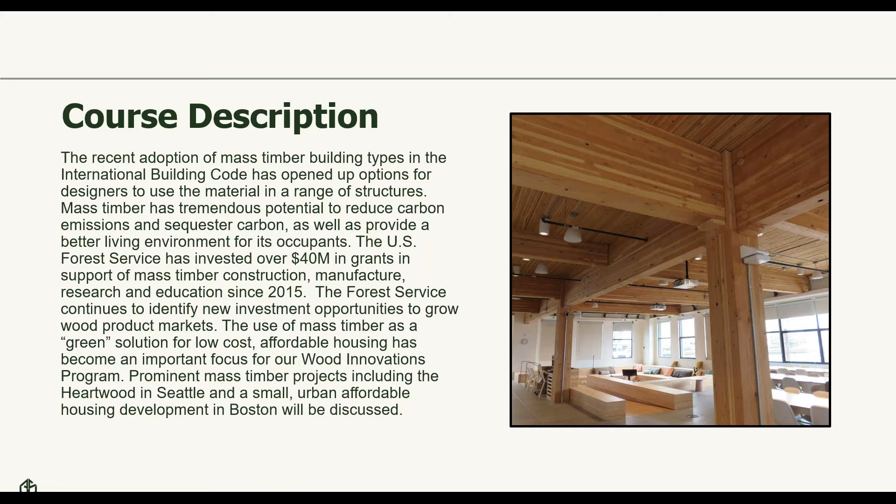We'll be covering the use of mass timber as a green solution for low-cost, affordable housing, and also look at a couple prominent mass timber projects in Seattle and Boston.

Again, you hopefully saw the objectives when you registered, but by the end of this program, you should be able to recognize efforts to promote mass timber investment opportunities, explain why mass timber is a viable alternative for affordable housing, describe how mass timber can overcome challenges related to urban infill construction, and discuss why mass timber is a feasible option for both large and small projects.

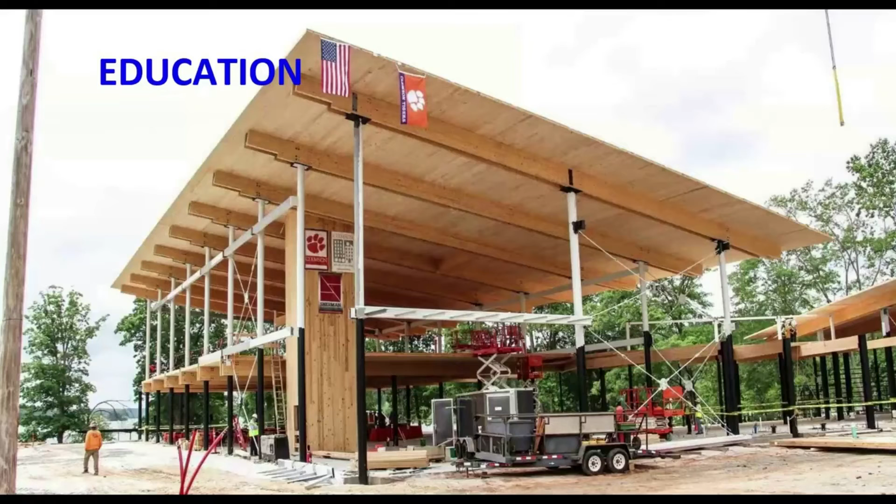I want to point out that building is the Andy Quattlebaum Outdoor Recreation Center at Clemson University, built with southern yellow pine. That was the first southern yellow pine mass timber building east of the Mississippi. We funded Clemson University a grant last year to develop a combined training curriculum for architect, engineering, and forest product students.

Clemson partnered with the Softwood Lumber Board and WoodWorks to implement this program. What's unique is during the school year it'll be for students, and in the summer it'll open up to the construction, engineering, and architect professionals applying the trade now. This is something the Softwood Lumber Board, our partner, has a strong focus on, and I think we'll see this potentially over time with other universities.

I think that's really great. That's where we need to see a lot of education, of new students, not just current practitioners.

Think Wood Mobile Tour - we helped fund that again this year. That's an initiative led by the Softwood Lumber Board and Think Wood. The Think Wood Mobile Tour partners with the AIA to take this mobile wood product display around to universities and to wood product events in the U.S. This has been a very successful program and has brought a lot of attention to wood and to mass timber.

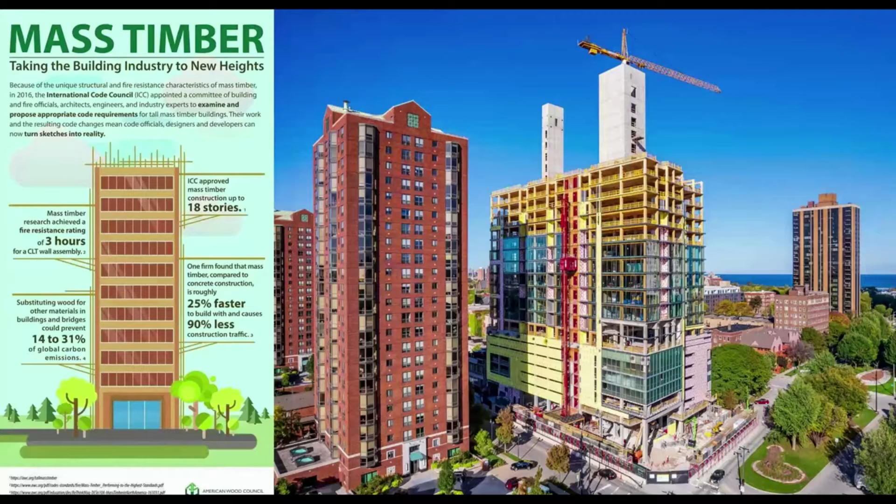Research and code - a lot of our funding goes to support partners doing research for mass timber. We helped support different partners, which ultimately led to changes in the 2021 building code, allowing tall timber buildings up to 18 stories. Most recently, we've supported fire testing with partners that helped make changes to the 2024 tall timber portion of the IBC, which allows exposed mass timber up to 12 stories, which is really great.

We've done fire testing at the Forest Products Lab. We've also supported fire testing with other partners as well, which all led to those changes in the code.

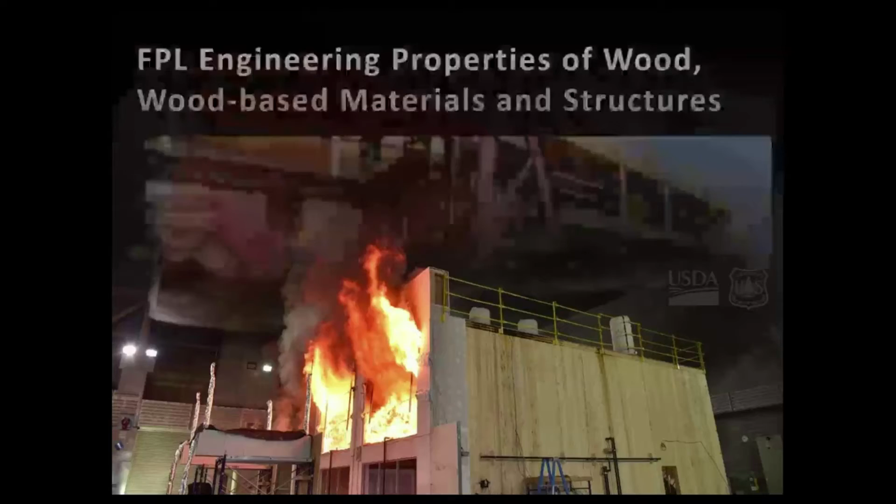Most recently, we're supporting the 10-story shake test that will take place soon in San Diego. This will help strengthen new opportunities along the earthquake zones in the West and give greater confidence to building and code officials for mass timber and tall timber buildings.

Special initiatives - this is the University of Idaho ICCU basketball arena. We funded this in 2019 in partnership with the U.S. Endowment. We supported a competition for universities, and 10 universities received funding to support mass timber projects, most of which turned into buildings, which was really great. This is just a beautiful example of mass timber, and it drew a lot of attention throughout the U.S.

Last year in 2022, we partnered with the Softwood Lumber Board, and Woodworks again helped lead out this net zero mass timber competition, which focused on low carbon timber design. Six buildings were awarded, and the total award was $2 million. Next year in 2023, we're going to partner again with the Softwood Lumber Board on another mass timber competition to bring attention and highlight mass timber in different parts of the U.S., which is again another really powerful initiative that we're trying to support.

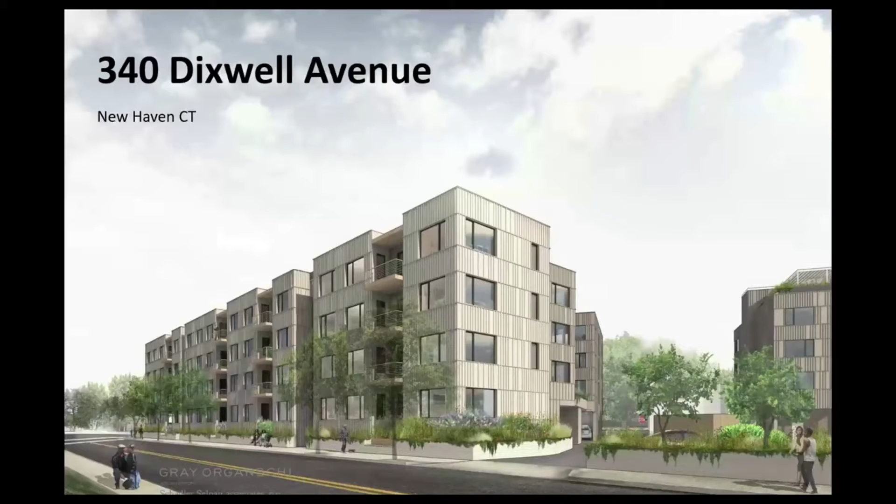Some of the projects that we have funded - we funded Gray Organschi a grant, and this project, 340 Dixwell Avenue, is just coming out of the ground. This will have affordable housing in the city of New Haven, Connecticut. What's really interesting with this project is in their work with the city, the city has identified green zones, and as a result of the work that Gray Organschi did on this project, the city included mass timber as part of the solutions to be able to get to net carbon zero in these green zones.

Another project that we funded - I think this is neat because this is in West Des Moines, Iowa. We funded this, the Junction Catalyst Development. It's a project in the city, and it's affordable - it'll include affordable housing, and they built this out of mass timber. We gave them a grant last year for another project, the Star Lofts, which will include affordable housing.

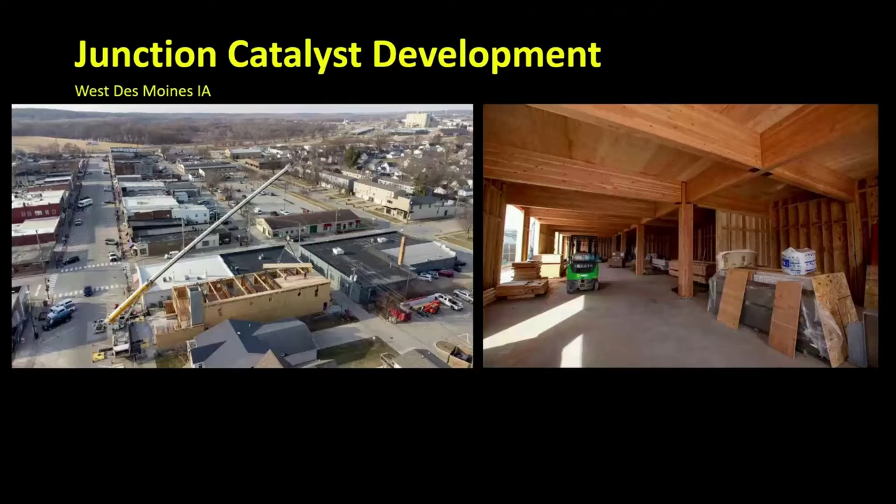I showed this picture because they built this so it fits within the neighborhood - the area, they were particular about the way it looked, and so this building will fit nicely within the look that the city has. But it's nice that we're doing projects in smaller cities as well as larger cities. And then it's kind of just a list - we have funded a lot of different partners in the last several years on projects related to mass timber.

Susan Jones has received several projects. I know she's talking here on this call. Another big project is the one that Kaiser Path has been doing in Portland, the Seedlings to Shelter.

We've seen a lot of interest in affordable housing through our grant program, and I think we'll continue to see that over the next several years. We're very excited to be able to fund with our grant program projects that can help resolve some of the issues related to affordable housing in the U.S.

What's more important is that the federal government now has a net carbon zero goal by 2050, and GSA will be looking at mass timber as a solution to their new buildings to get to net carbon zero. So I think in the future we're going to see the federal government, and ideally more state governments, looking at mass timber.

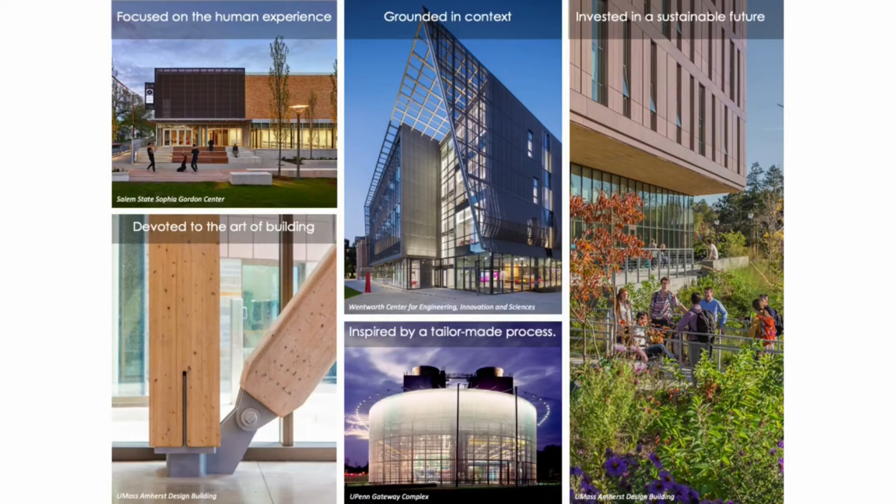With all our designs, we strive for our core values, regardless of project size and type. We aim to bring the value of design excellence, focused on the human experience, sustainability, and craft of building, to ensure a solution that is right and appropriate for each project and client. With every project, we respect our client's budget and schedule and design to that. We like to call it responsible design excellence.

As much as we believe in the value of design, we believe in an equitable and just practice in our work, giving back to our communities near and far, and in our practice having a diverse group of architects and designers. We're proud that we are majority women in overall staff as well as leadership, and with over 35% minorities.

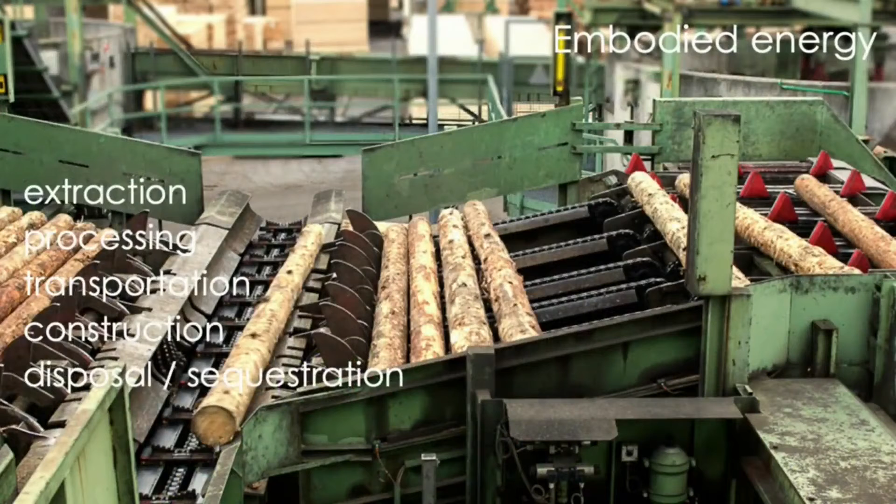So why mass timber for affordable housing? We know that wood is fundamentally sustainable since trees grow, and as it grows, it takes carbon from the atmosphere and stores it. In addition, the overall embodied energy or carbon emissions of building with wood, from extraction, processing, transportation through construction, is much lower than other building materials such as steel or concrete.

We explored these in our two large-scale built projects: the Adohi Hall at University of Arkansas, a student housing project completed in 2019, which was the largest cross-laminated timber building in the U.S.; and the Olver Design Building at UMass Amherst, completed in 2017, among the first large-scale academic mass timber buildings in the U.S.

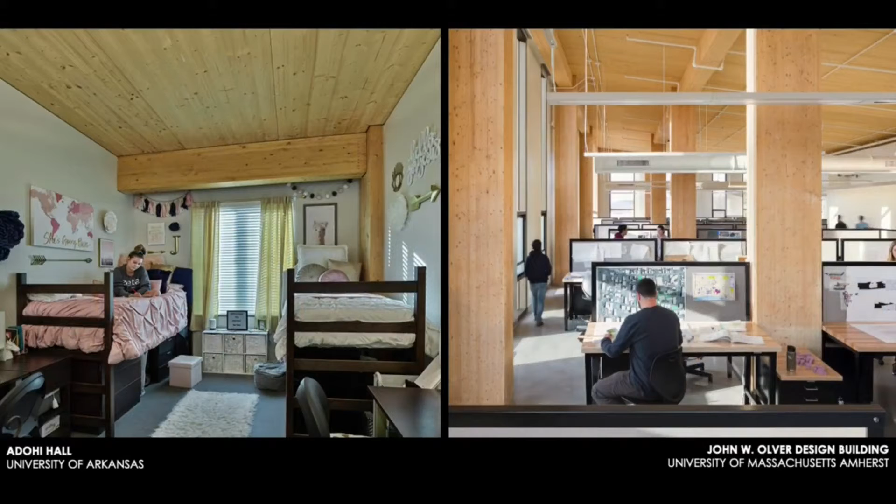We explored the potential of mass timber to create special places for gathering and building communities, all the way down to the most private of spaces - the student dorm rooms at Adohi Hall, and the studio spaces at the Olver Design Building.

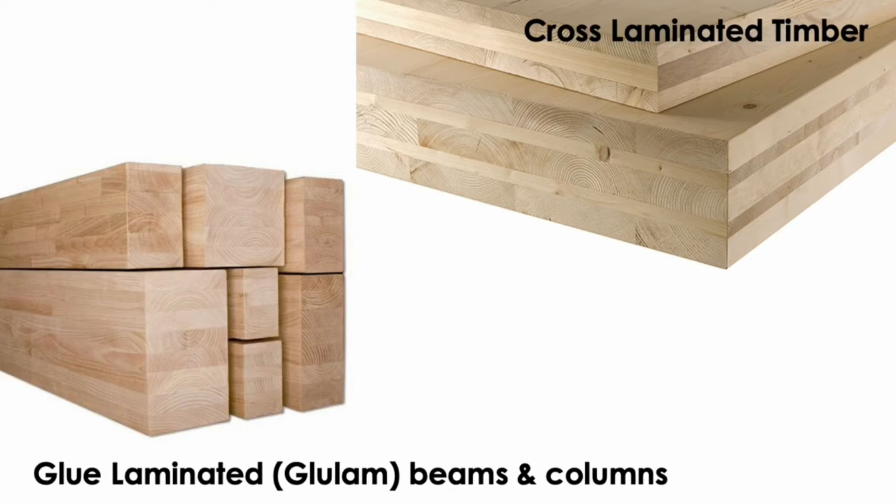The mass timber components we used were primarily glue-laminated timber for columns and beams, and CLT, or cross-laminated timber, panels for floors, roofs, and walls. We took advantage of the cutting-edge technology resulting in the precision and high quality of such materials.

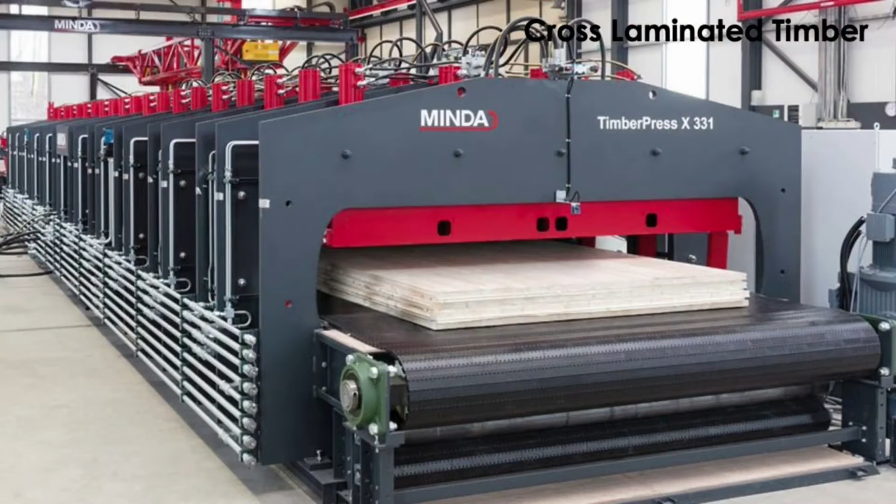Here we see images of a CLT factory, highly automated with large-scale machinery such as this press, and the CNC machines that allow wood to be used to produce large-scale buildings for growing urban centers.

But there is a cost to such technology, with investments in CLT factories being in the tens of millions of dollars. While that isn't a factor in large-scale projects that compare with costs for steel and concrete buildings, for very small affordable building projects such as ours, which must compare to light frame wood construction, there is a cost consequence to the investments in this technology.

In addition, we consider the embodied energy of material production, and in the case of wood, timber harvesting to debarking, and lumber production, which often is the base unit for the various mass timber panels. In the case of CLT, additional drying of the wood, planing, finger jointing, gluing, and post-production machining, all of which has cost as well as carbon footprint implications.

We said, for such a small affordable housing project that must compete in cost to a light frame wood construction, how could we not absorb this additional cost as well as the carbon impacts of a mass timber product that is highly specialized like CLT?

That is, looking at the embodied energy, could we reduce the carbon footprint associated with processing and perhaps even transportation?

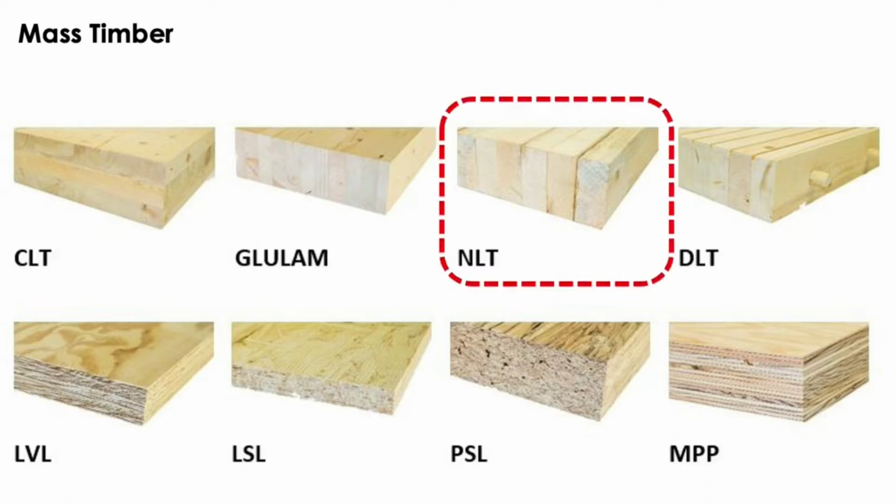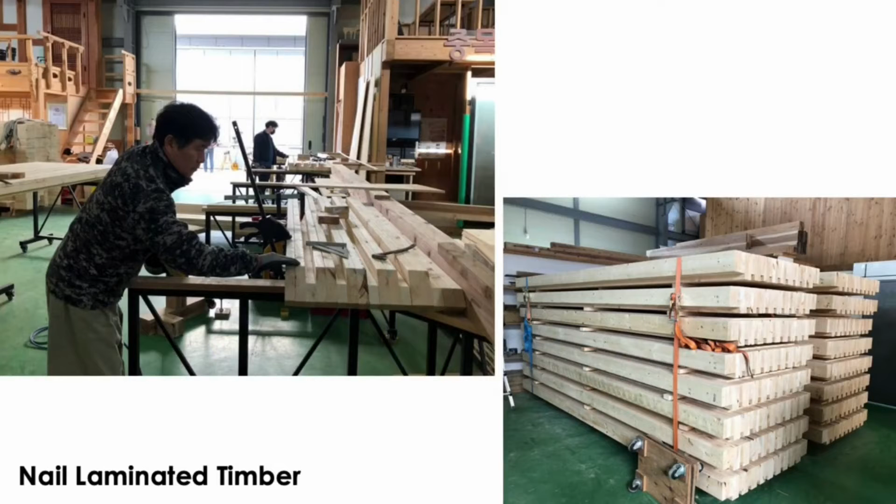In looking at an array of common mass timber products, we investigated nail laminated timber, which is the closest in relationship to lumber, as it is simply lumber 2x4s and 2x6s mostly, which have no further post-production other than nailing them together without involvement of expensive machinery, which could be produced nearly anywhere and by hand in sizes small and large, and used in many of the ways materials like CLT are used, such as floor and roof panels.

And one which sequesters as much carbon and has the same biophilic qualities of wood that make wood spaces that promote user well-being.

So we investigated this approach in our case study, the Eliot Church Affordable Housing, which we just completed in concept design. This was made possible by the Boston Mass Timber Accelerator Grant Program from the Boston Planning and Development Agency, the U.S. Forest Service, and Softwood Lumber Board.

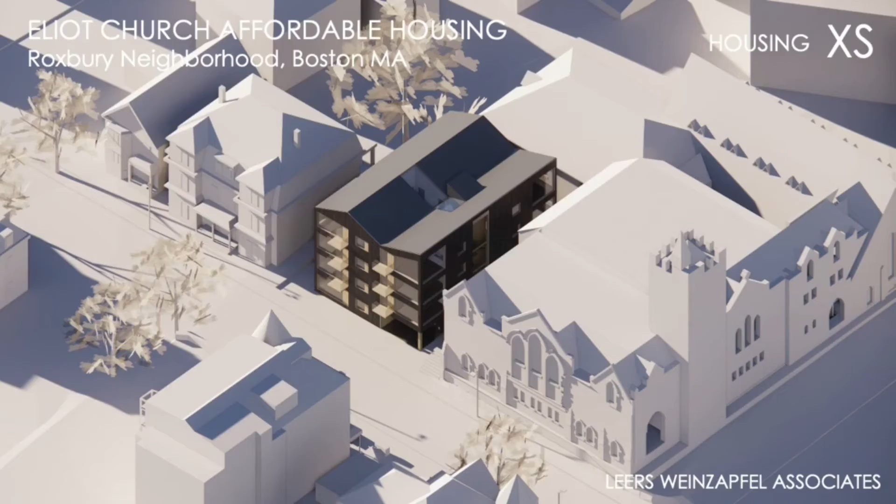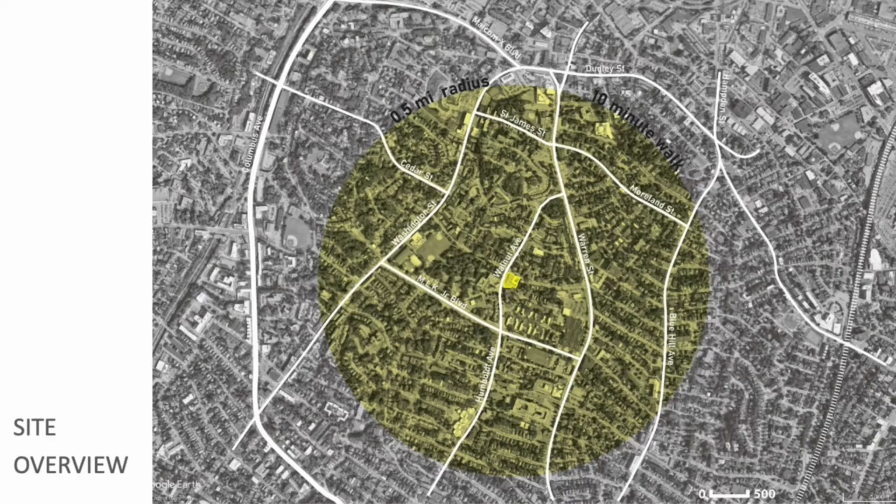This is a very vibrant minority community, primarily African American and Hispanic, rooted in community, faith, and family, but one that lacks in capital investment and one that most visitors or residents of Boston don't visit, as in the case of many of our urban minority neighborhoods.

The project became possible as a result of proactive initiatives of the Eliot Congregational Church, which is one of the community pillars of the Roxbury neighborhood. And we became involved as a result of their ongoing partnership with Wentworth Institute of Technology, where I taught as an adjunct faculty for many years.

The Eliot Church wanted to make good use of their primary resource, which was their building and land, to explore affordable housing for their community, and we identified a small site of around 3,000 square feet.

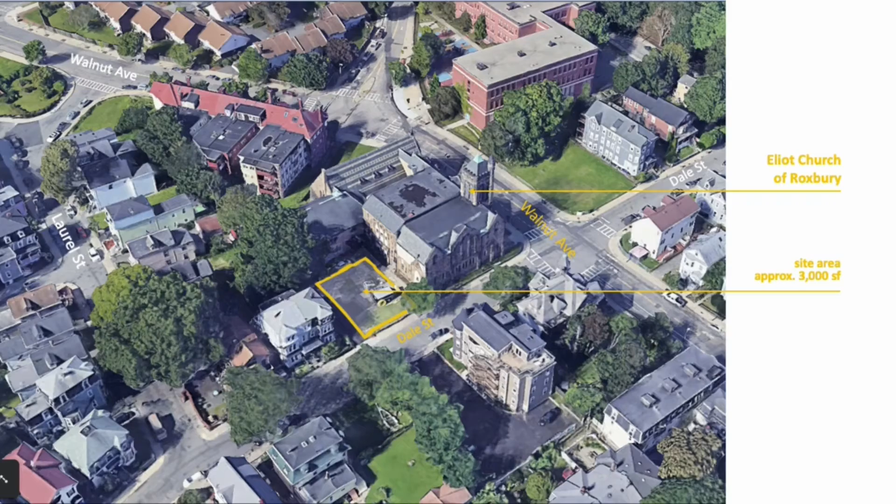It became very clear that the main church building was mostly off limits to investigating affordable housing, as it was on the National Historic Register, and given the impracticality and extraordinary expense of converting such a building type for housing.

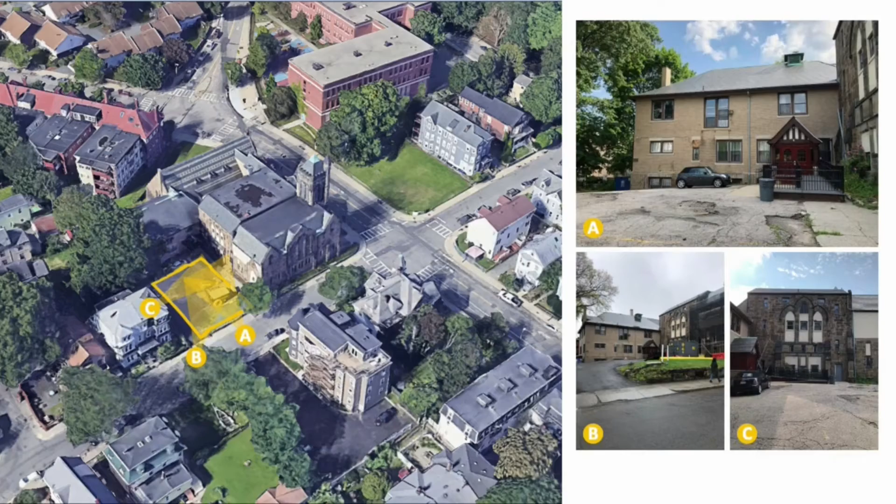You can see some of the primary views of the housing site identified for our project. And looking back at the neighborhood, our analysis showed an array of vernacular small-scale residential typologies of light frame wood structure, such as the single family, the duplex, and the triple decker, on similar lot sizes that could benefit from our investigation of mass timber housing.

Preliminary analysis of zoning and context studies resulted in a maximum build of 15 to 16 units for a 4-story structure of 12,600 gross square feet. In addition, cost parameters ranging from $300 to $325 per square foot was established, consistent with City of Boston guidelines for affordable housing.

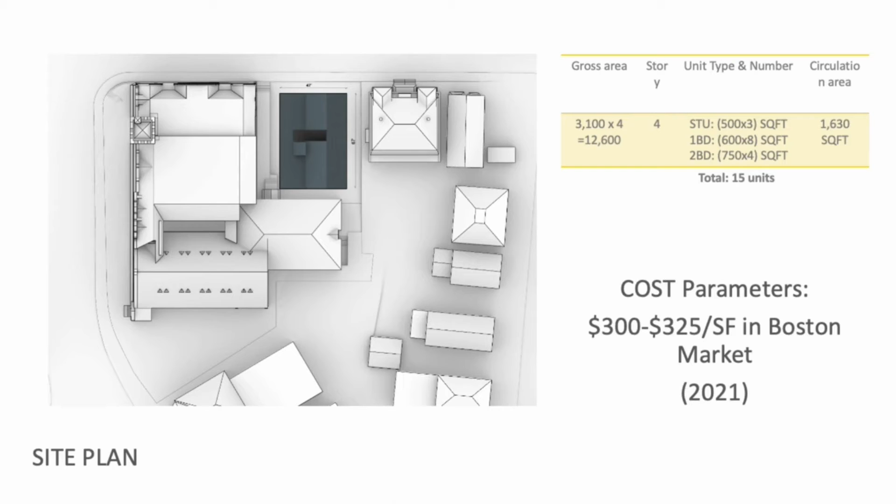Given these parameters, we were ready to explore the use of nail laminated timber for the project.

To make best use of NLT, taking into consideration carbon storage, structural efficiency, design flexibility, and potential to expose the wood for a biophilic effect, we decided on the use of NLT for all of the floors and roof, as well as inner core walls, in a structural grid width of 14 to 17 feet wide that would allow for 2x4s and 2x6 lumber, less expensive than 2x8s or 2x10s.

These NLT floors and walls would need plywood sheeting on one side to provide continuous structural diaphragm for the floors and lateral shear capacity for the walls.

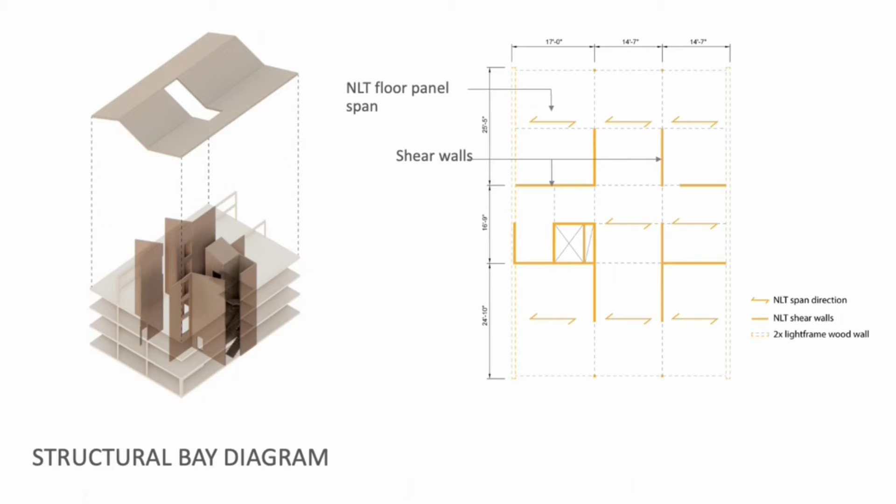We had to follow the unit size guidelines established by the City of Boston to be eligible for city funding, and configure such units within the NLT structural framework we established, consisting of 2 one-bedrooms, a 2-bedroom, and a studio, so 4 units per floor of various sizes to accommodate a wider array of residents. On the ground floor, which we see on the left, we eliminated one of the units to allow for an entry and a common space.

In addition, the layout consisted of a smaller circulation core with a single stair, an elevator for equitable access, and a compact hallway to maximize housing unit areas and keep the grossing factor as small as possible, allowing for the perimeter for the bedrooms and living rooms.

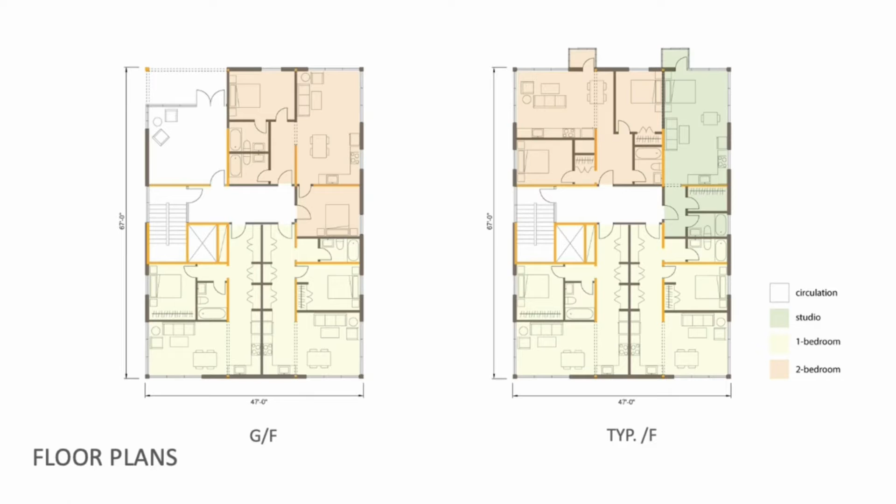By working within a small span structural grid and containing the shear structure to the core of the building, this allowed for design flexibility of various roof profiles and facade arrangements to maximize larger corner windows where the main living rooms of all of the units would be located, as we envisioned the project to serve as a kind of prototype for similar small-scale developments on empty lots of similar sizes all around the neighborhoods in the city of Boston, as well as other similar urban centers.

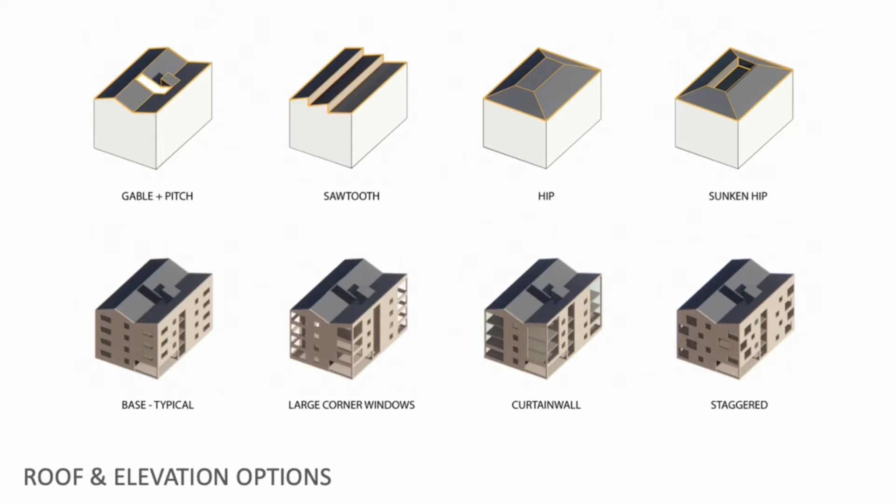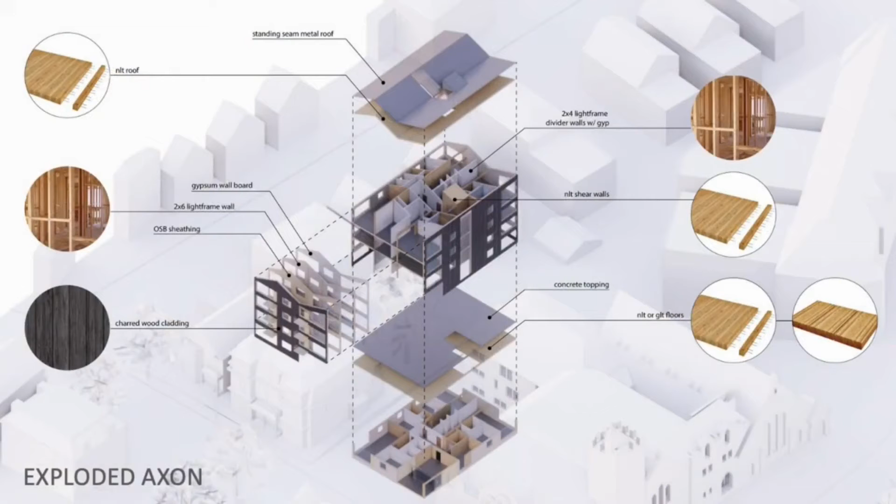And conceptually, we identified all of the structural mass timber components in conjunction with the typical light frame wood construction and the rest of the architectural building assemblies.

And in looking at the carbon storage benefits across the construction type, lumber used, as well as other wood products, our approach resulted in twice the carbon storage for a project consisting of NLT and light frame as compared to the typical all light frame building approach.

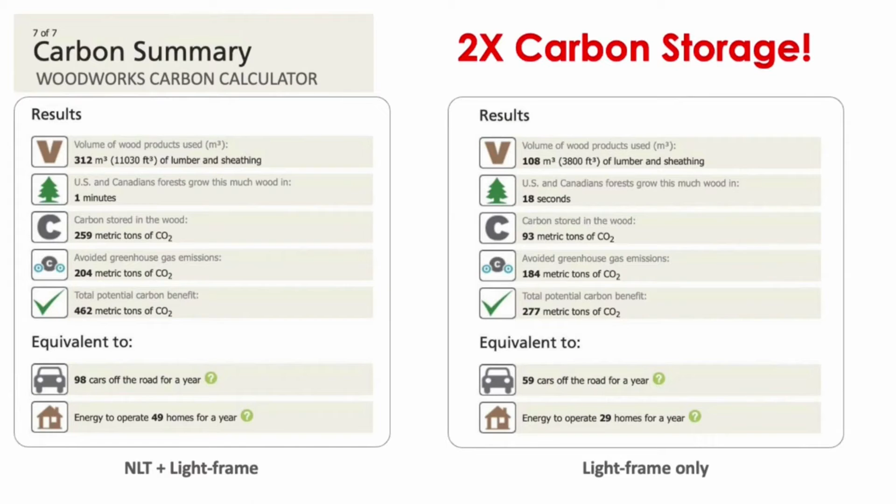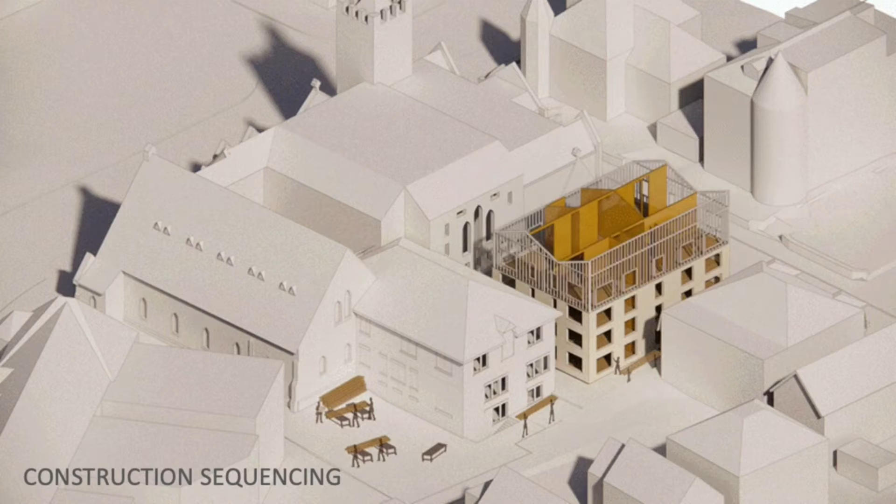And we envisioned a construction process similar to those done for light frame wood with small local contractors, with added efficiency of prefabricated NLT panels and stud wall assembly, flexible enough to be adapted for a specific site in an urban neighborhood, and in our case, the ability to use an empty parcel on the church property to make NLT panels on site in sizes small enough to be hand delivered to the building site.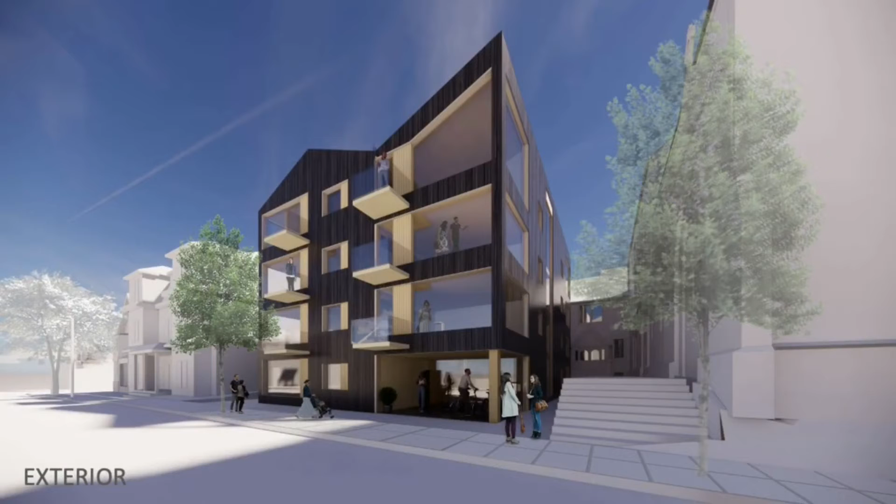The resulting project then is clad in charred wood to reduce maintenance and increase the durability of a wood cladding system, but one that could take on a different cladding material on other sites.

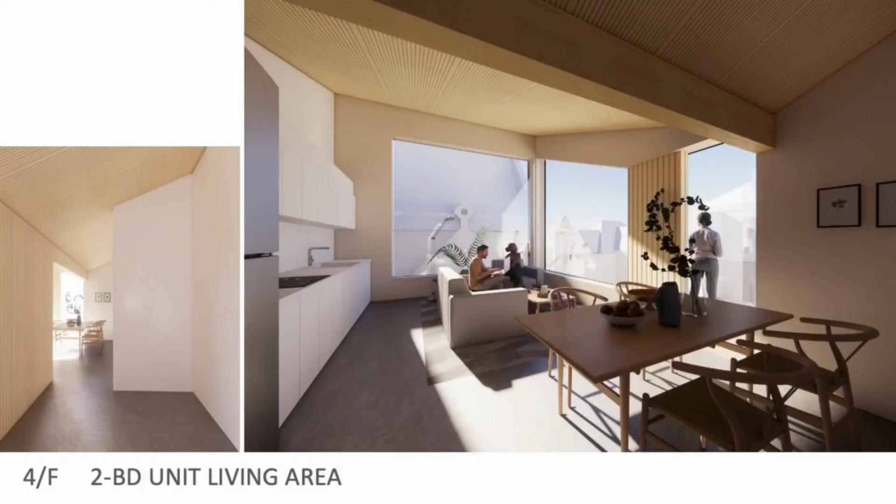The interiors of the units would be light-filled given the larger corner windows in the living rooms for all of the units, along with the expressed warmth of the exposed NLT core walls and the underside of floor panels in the ceiling plane.

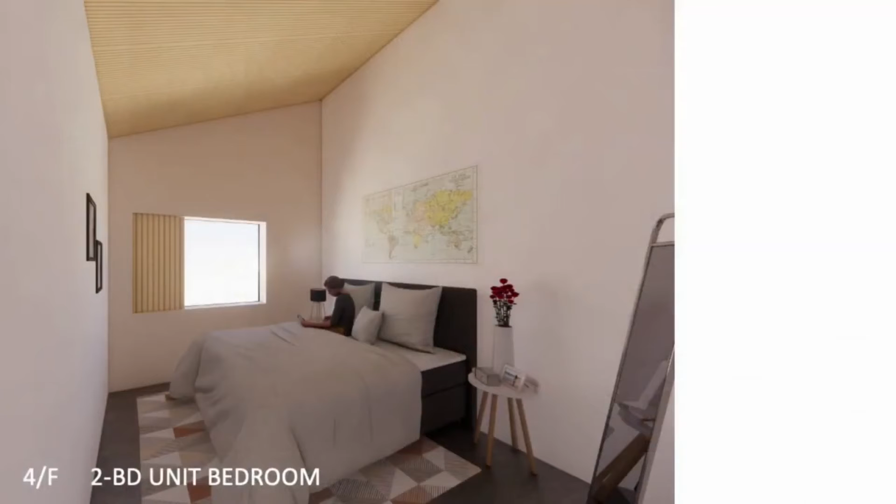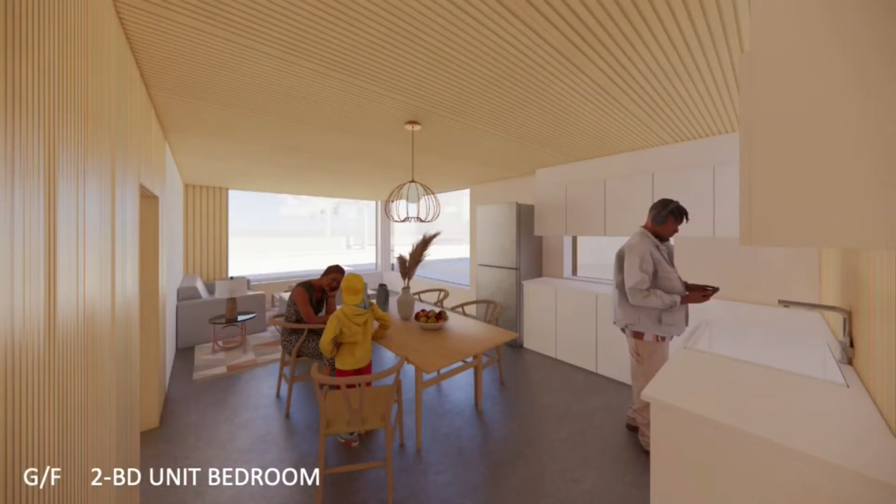Bedrooms would have at least the ceiling plane with exposed NLT panels, with careful arrangement of light fixtures and sprinklers on the side walls to keep the ceiling plane clean, as we did at our Adobe Hall project. And even the lower level units, while not having the lofted higher ceiling heights, would also benefit from the exposed NLT throughout.

So in conclusion, we go back to the crisis of carbon emissions in our environment today, and as we've made good strides in recent years in addressing operational carbon with an array of renewable energy such as hydroelectric, geothermal, solar, and wind power for much of our building, heating, and cooling needs.

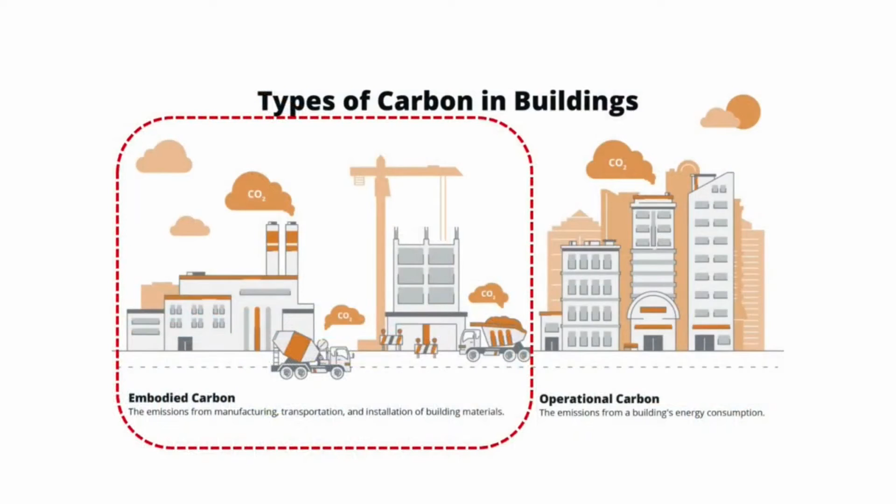In addressing the embodied carbon, that is the carbon emissions related to the construction of a building before day one when that building is occupied and in use, we understand that as far as we know, wood is the only renewable building material. And until some brilliant scientists one day might be able to figure out how to grow concrete or steel, we have to reduce significantly our carbon emissions if we are going to address climate change.

And because statistics show that more often than not, it's the minority communities that are the most adversely impacted by the results of climate change, the point I would make is that it's not only sustainable to build with wood, but it is just and equitable to use mass timber for housing for the least privileged among us, that they may thrive and enjoy better housing and not continue to shoulder the burdens of climate change.

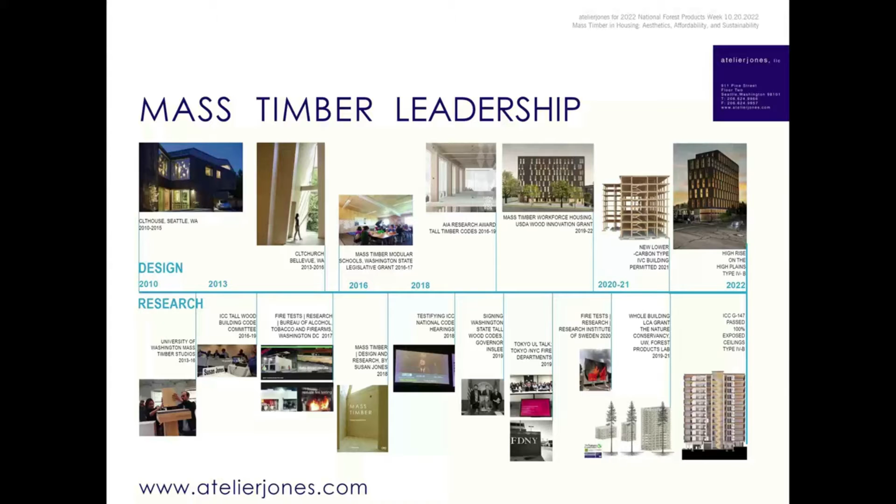And now my firm is building one of the tallest mass timber buildings in the US. I think I heard it was one of 15 in North America, and it's workforce housing, here in Seattle, Washington, and I'm going to show it to you later as we move forward. We've been really proud of this journey and really excited to share bits and pieces of it with you.

It's really exciting to me to be part of the leadership of the mass timber world as it starts bringing these products to higher value products to market and helping our rural communities all over the country to rebound and restore their communities and our forests as we move forward.

And that's one of the reasons I threw my hat in the ring to help change these codes for mass timber, to build taller buildings at scale, which will help sequester the carbon in those buildings, but also help substitute for higher carbon buildings in the environment as we move forward.

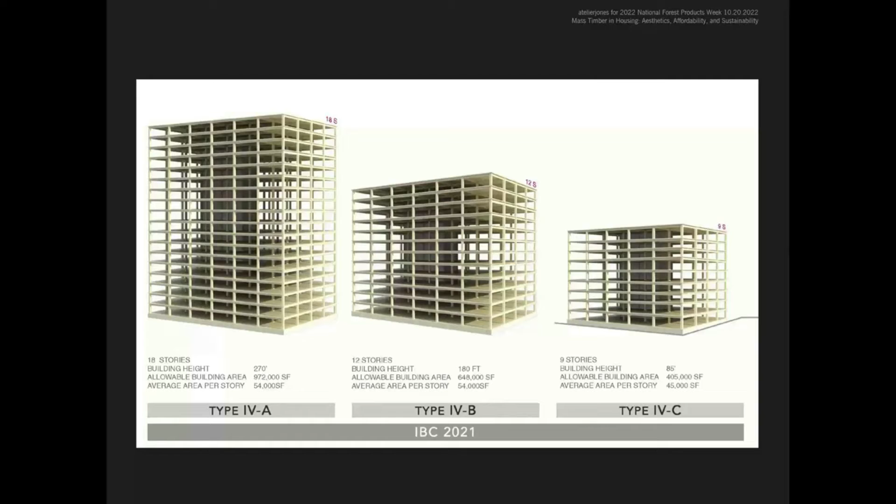So we spent about 3 years redesigning those codes to allow for mass timber at a high-rise scale, at 9 stories, at 12 stories, and at 18 stories, all over the US in jurisdictions that adopt these national tall building codes, the ICC codes. So in the IBC 2021, we can now expose the timber all up to 9 stories, and much of the timber up to 12, and build 18 stories tall with wood, which is amazing to me.

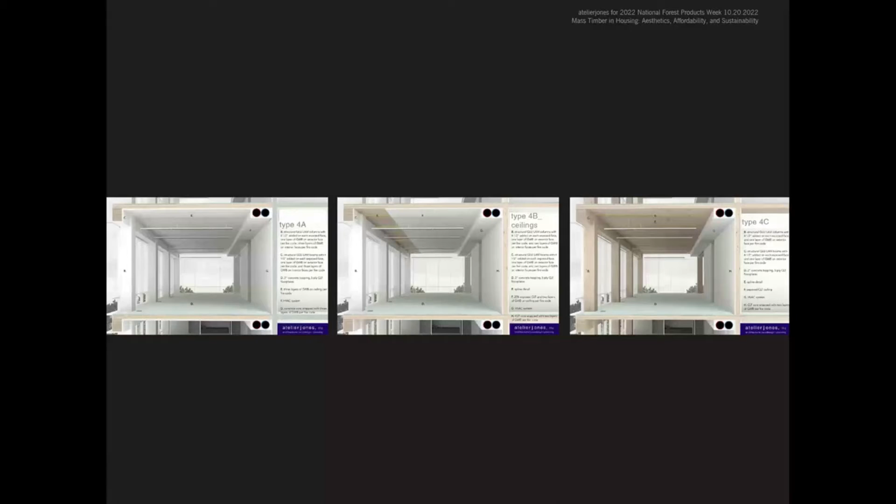We were inventing new kinds of building types, and it was an exciting process to begin to rethink how you would build a high-rise out of wood and do it safely.

We were involved in a lot of fire testing that the forest industry helped promote and sponsor, done outside of Washington, D.C. at the Bureau of Alcohol, Tobacco and Firearms. I had never seen a fire test, and to see them try to burn this 2-story building down 5 different times with the amount of heat generated from those fires was incredible, and the buildings didn't burn down. It was one of the key turning points in our quest to prove that tall mass timber buildings could be built safely. And so we passed those codes.

This is a picture of a kind of stressed out me in 2018, testifying for the IBC General Committee action hearings. I am happy to say that we did win that battle against some really strong forces, as some of the other products like concrete and steel were pushing against us at the time. We were successful, and now those codes are law.

This is a picture of me with our wonderful Governor Jay Inslee, really signing those codes into law in Washington state, just a few months after we passed them by strong margins, which you can see on the left. It was a thrilling day for me when those codes passed.

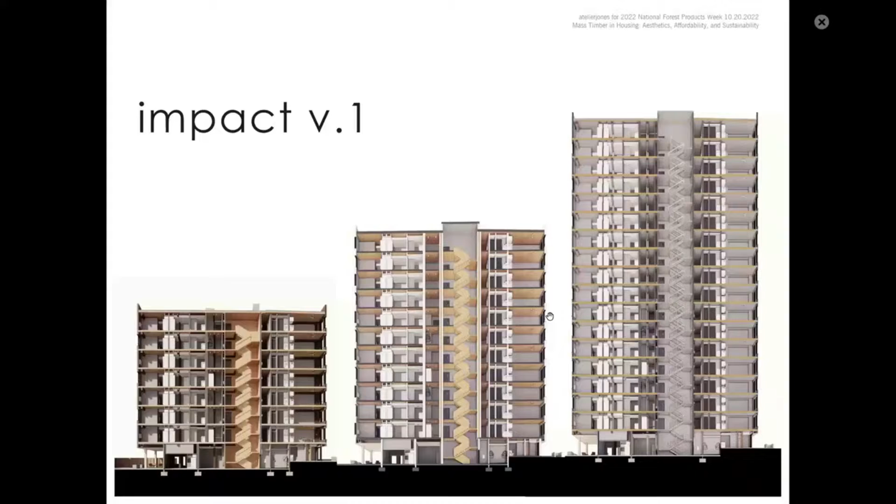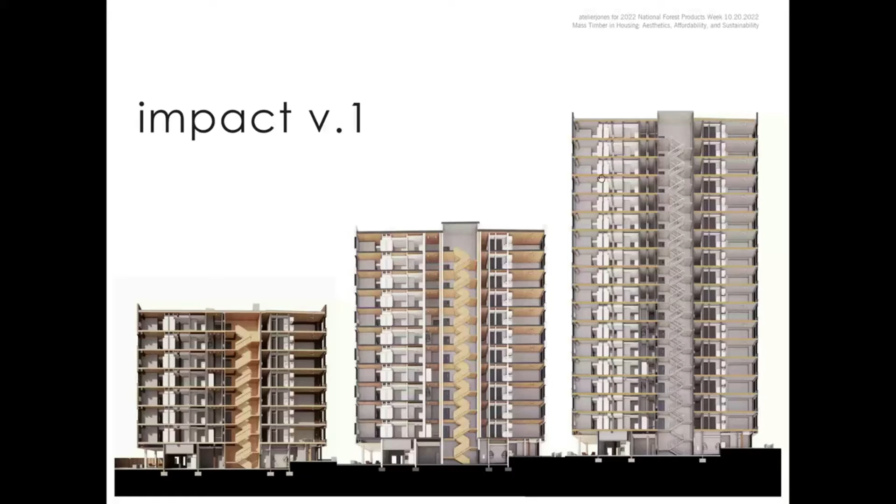And now that impact is really beginning to show with these kinds of buildings that we can build. The one on the left is the 8-story mass timber, type 4C; type 4B in the middle, 12 stories; and type 4A. You'll notice that you don't see much timber in type 4A, but that's because the codes required us to make some compromises to cover some of that up.

I think this is where we do need more fire testing, to advance our cause to allow that to be exposed and to have less costly and less carbon intensive gypsum wallboard as the covering for those pieces of timber. Because as I know deeply, those codes have been very conservative.

So this is one of the reasons that we, as a small firm at atelierjones, investigated under the aegis of the Nature Conservancy, the University of Washington, the U.S. Forest Products Laboratory and Woodworks. We helped develop some LCA studies that were just published a year ago, and it was an extraordinary effort to really help prove that these buildings had significantly less of a carbon footprint than their contemporary comparisons, up to 43% less for an 8-story building, and a bit less, say 30% less, for an 18-story.

And that's because of a lot of that gypsum wallboard, which, as I just mentioned, we feel is sort of unnecessary. But these carbon studies are very critical to help prove that point. We all know how important it is to help lower our carbon footprints in our building industry across the country.

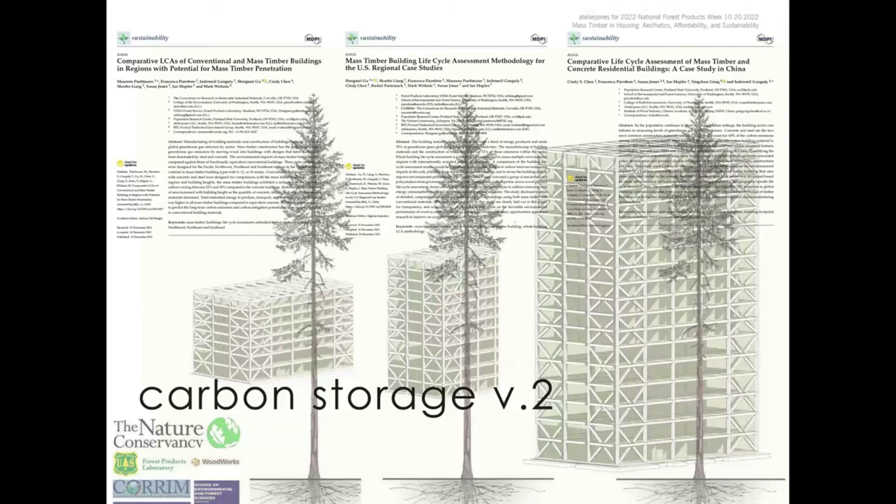We again built five structures over in Sweden, this time in an outdoor arena, and yes, we tried to burn them down 5 times for 4 hours with no sprinklers, and they did not burn. These are the kind of research efforts that I feel really strongly need to be continued, to prove and bear out that these structures are safe, and that we can contain any fire that might occur within that compartment, and therefore the structure of the building is safe in the future.

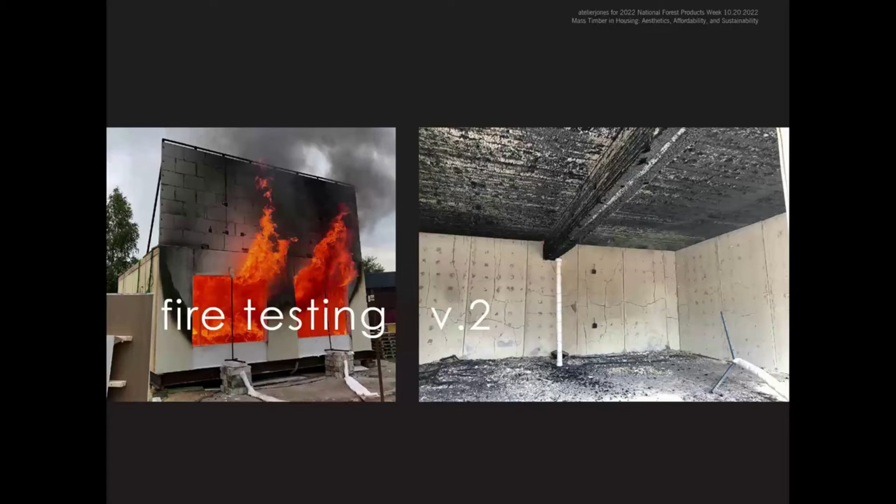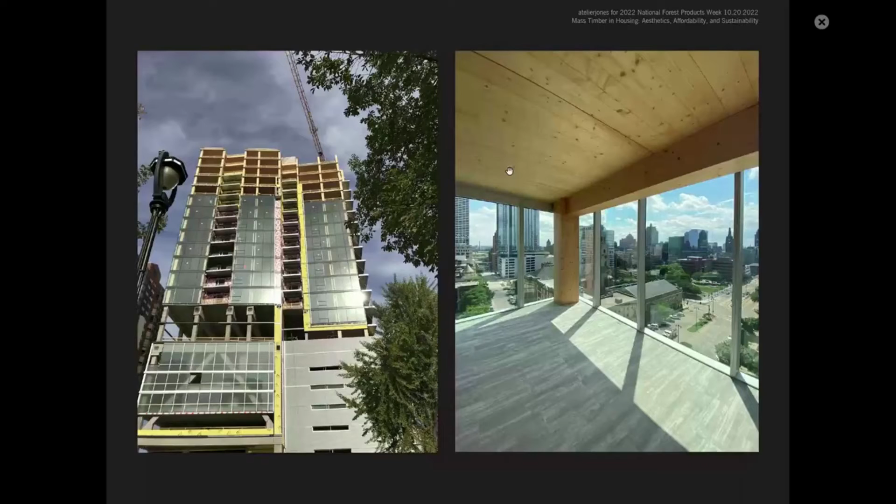But the impact from that last fire test was yet another code provision that allowed us in 12-story buildings to at least expose the ceilings up to 12 stories, which was a very exciting advancement. So we're making progress on a yearly basis, year in, year out, thanks to the research funded by the U.S. government. And now today the codes are active, the buildings are active.

There are 15 very tall buildings, that is 8 stories and above, around the North American continent that are built or in construction. This one is in Milwaukee. Atelierjones did not build this; it was designed by Korb + Associates Architects. You've probably heard a lot about it because it's pretty dang famous. I always forget if it's 27 or 29 stories tall, but it's pretty darn tall, and it sits over a concrete podium of 7 stories.

And yes, it does expose all of that mass timber. In the opinions of the jurisdictions, it's pretty darn safe to do that. And as you can see on the right with the finished photo, it's an amazingly beautiful environment to be stunning, sitting over the skyline of Milwaukee, looking out to the skyline and sitting in a wood building in your own home.

So we were asked in 2019 to begin to design a building that would fit on this parking lot, and very happily we had a grant from the U.S. government again to begin to design this building.

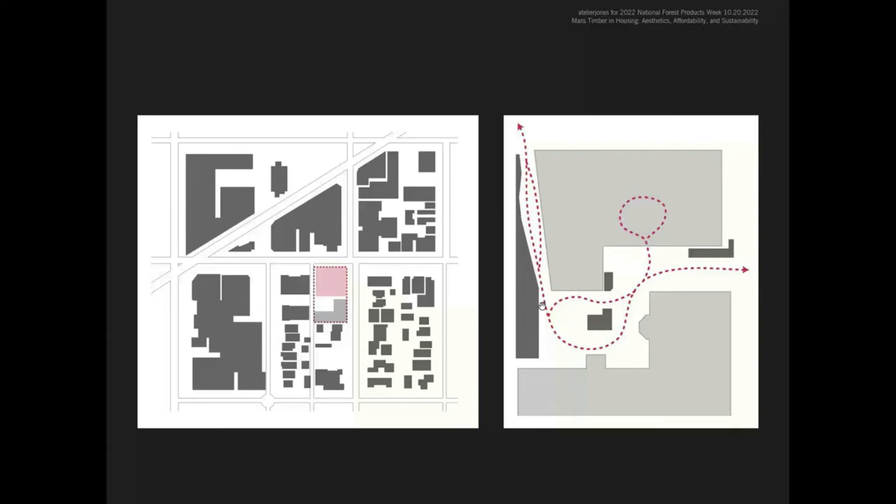This is this little brick building here, and there's this new building here, and we're building a courtyard that combines those two areas. The plans are very simple, and I won't go into all the geeky wood details that we do sometimes with audiences, but I want to say it's 126 units.

It was a very powerful team that we had together. It was highly collaborative, and that was in part thanks to the grant. We were able to bring this high-powered team from the very beginning all together. And it included ourselves, atelierjones, DCI structural engineers and civil engineers out of Portland and Seattle. Our owner was Community Roots Housing, and their developer rep was Skipstone.

We then partnered up with Wiss Janney Elstner to do the fire protection engineering, and Greenbusch Acoustical to do the acoustical work, and then brought on our partners, Swinerton Builders, who was a contractor, and then worked with Timber Lab, who was the timber post-processing. The timber came from areas around the Cascadia area, from Kalesnikoff to D.R. Johnson to Freres Lumber for MPP stairs.

This is the building as it was rendered. It stands 8 stories next to another brick building on a fairly busy street in Seattle, Union Street here. And we're really excited that it can bring the kind of density that we've been hoping for in Seattle to provide more workforce housing units, which, as you know, is a critical issue, not just the affordable housing market, and certainly not the market rate housing work, but this kind of missing middle.

How do you provide for people who have decent jobs, but the salary rates are not maybe matching up with our tech stars here in Seattle, which we know and love, but really their salaries do exceed those of teachers and dental hygienists and bus drivers, etc., and they need a place to live as well. So this is trying to address that missing middle, and it was a complicated funding strategy because it received no public dollars other than a small grant of $250,000, which was pretty generous to get this jump started. That process really worked. It was really exciting to have that seed money that really catalyzed this project forward.

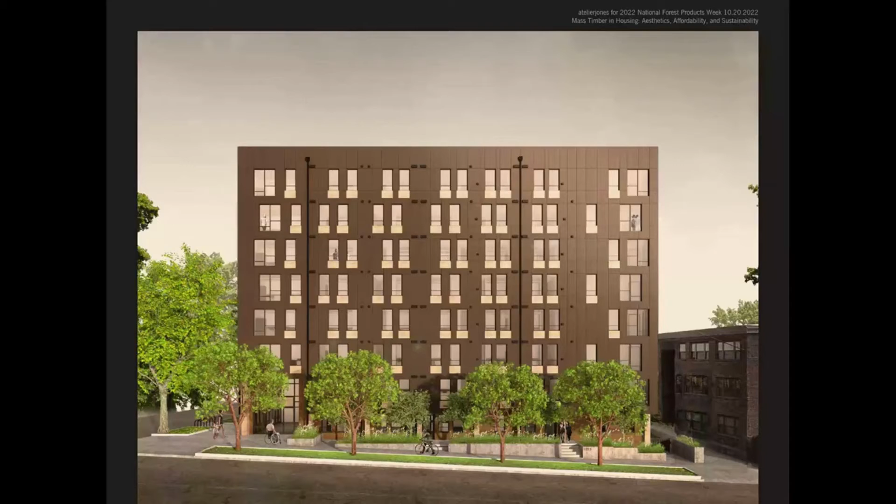A few more images of the project. It's a rather humble project, a lower cost project because of the workforce housing. It has a simple fiber cement exterior, and all of the exterior materials, because of the code that I helped write, need to be non-combustible. So while this may look like wood, it's a wood superstructure, but it's not wood on the exterior. And that's an important thing to see.

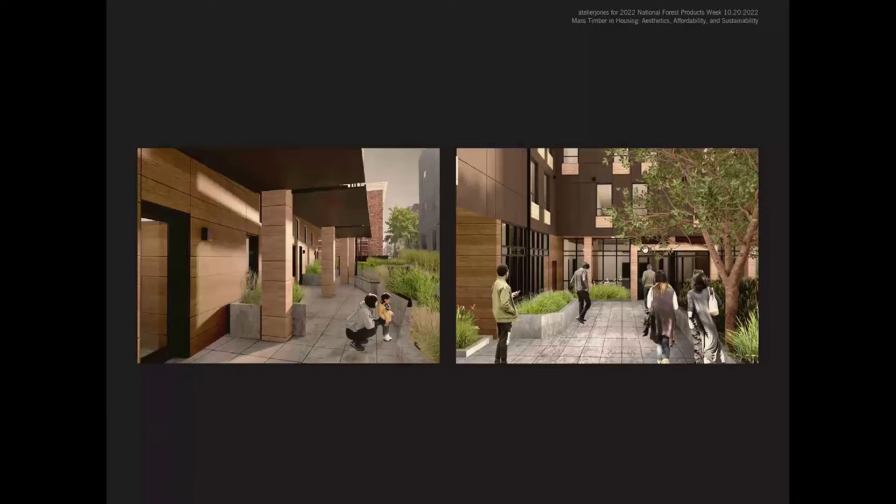This is some of the small spaces that are now under construction in between the buildings, and that's been really exciting. Some of the ways that the space moves into, and these small units that work out onto this area, and an idea of the lobby as you move across the courtyard, and that courtyard, of course, is shared between those two buildings. This is one of the more exciting images of the project, and this is where you begin to see the impact on these units and on the inhabitants of the units. And this was really one of the reasons that we pushed this project forward.

They're small units, studios, with a bathroom and a small full kitchen, and a bed that's part of the living room with two simple windows looking out to the city of Seattle beyond. In that unit, there's an exposed wood column, a glulam column, an exposed wood beam, and an exposed wood ceiling. It's an exciting version of that project to move forward on.

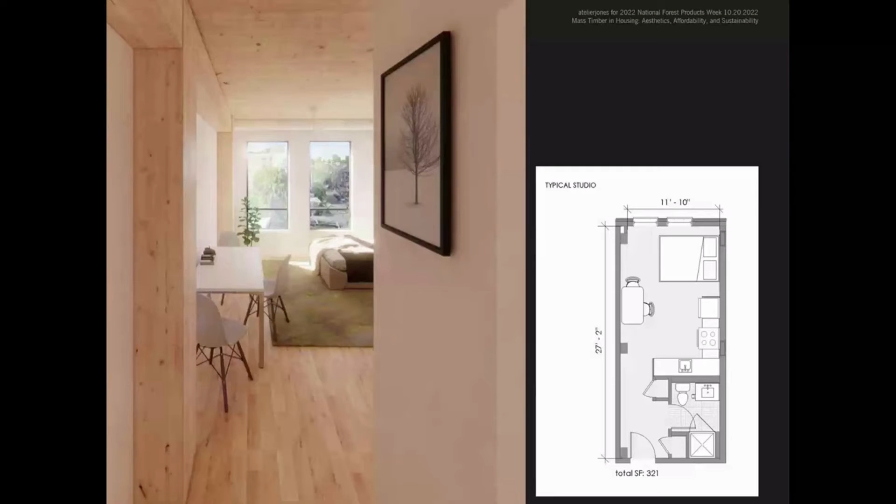This superstructure is really where the future of housing with mass timber is going. You can see it's all wood columns and wood beams, and all wood CLT floors, working to structure the building and provide lateral forces. We're also using wood stairs and a concrete foundation. It's exciting to think about how different this is, because this superstructure is about 43% lower carbon than anything else.

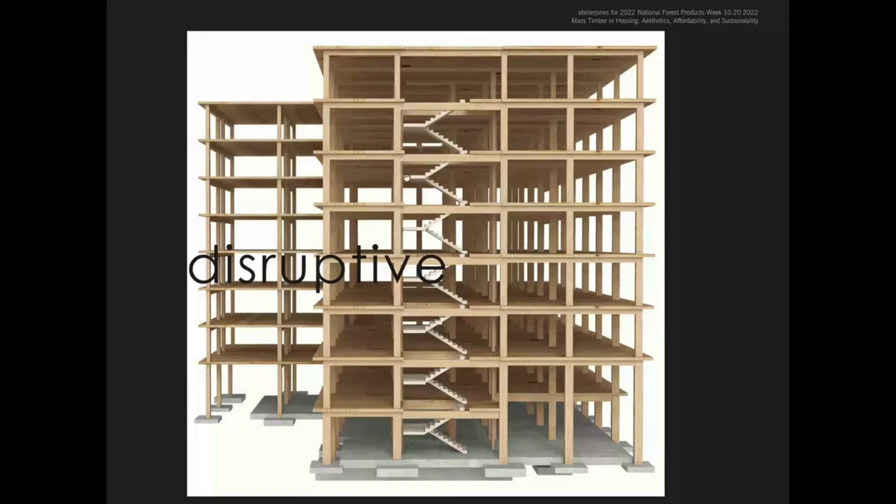It's also exciting when you think about where that timber comes from. It came from a regional geographic area, important for the regional biology, ecology, and biome—from D.R. Johnson to Freres, and Canadian CLT panels from Kalesnikoff. We had hoped to work with Katerra here in Spokane, but they weren't able to work with us because they were out of business at that time, for reasons unrelated to the mass timber industry. So we ended up working with a great supplier doing local forest harvesting, called Kalesnikoff, up in the Kootenays, BC.

That regional timber sourcing is one of the hallmarks of Atelier Jones' mass timber work, and we try as often as possible—I'd say it's been 100% possible—to source within this regional Cascadia area. I'm very proud of that.

One of the other exciting things about mass timber is that you can quantify the volumes of concrete, timber, and steel, and do careful work on the carbon calculations. These life cycle analyses, or LCAs, can be done very precisely because of the technology we need to create these buildings. It's exciting to be exact, not just to feel like there's less concrete and carbon, but to actually prove it through these life cycle analyses, which are a very powerful tool.

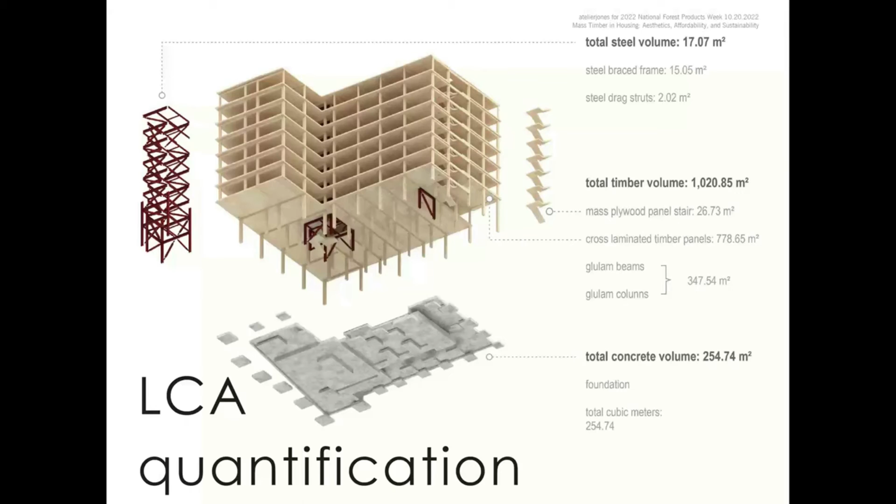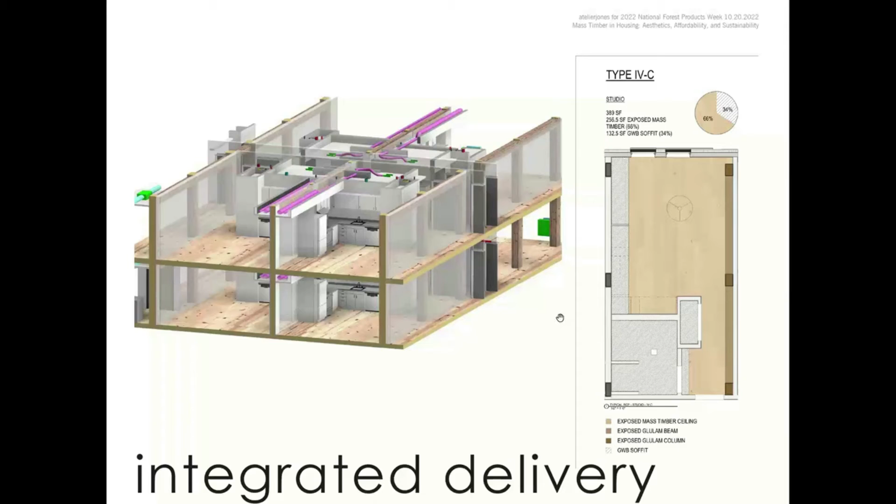This integrated delivery has been one of the most powerful elements. We work early on with our contractor, our timber post-processor, the panel suppliers, as well as our mechanical, electrical, and plumbing engineers and contractors. We create a big BIM model—building information model—that has all of that information together. Right from the beginning, we understand how to reduce the amount of soffits, which reduces costs since soffits are always an extra expense. Most importantly, we can increase the area of exposed wood for the project.

Lots of innovation went into how we build these two-hour rated connections. I won't go into all the geeky details, but it's a really exciting detail we developed collaboratively with our partners at Timber Lab, Swinerton, Wiss Janney, and DCI Engineers, to create this cutting-edge, highly developed all-wood connection between columns, beams, and CLT.

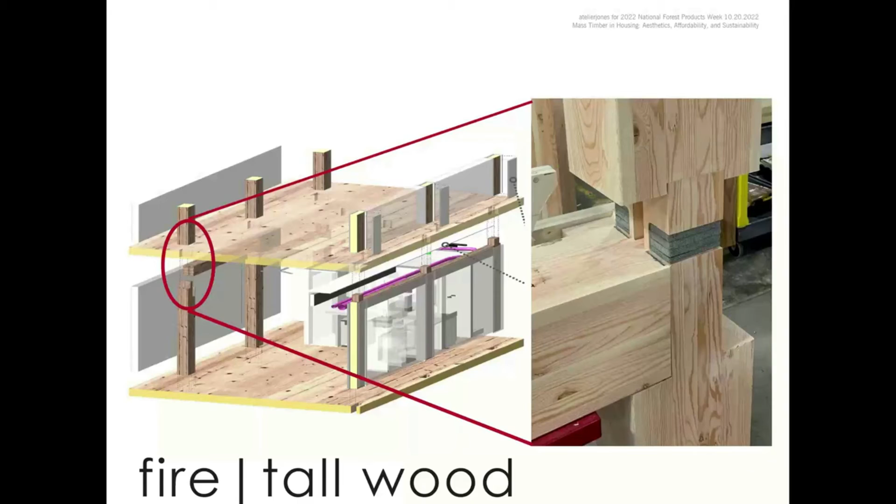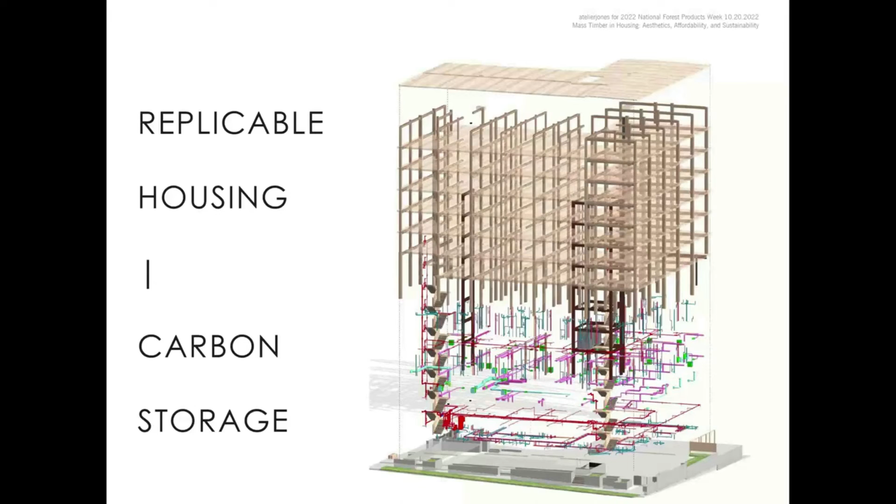And that leads to this notion of this housing project being replicable. You can take this superstructure - this is a live BIM model from ours, a live Revit model, with the services integrated into it. We can now take this model and begin to repeat it on different sites with different designs, slightly different dimensions and unit layouts, and still capture all the intellectual property in the layouts and details that was working for this project on our network in my small office in Seattle. I'm really excited about the future of doing this, because this project is going very fast. This is another piece of this disruption.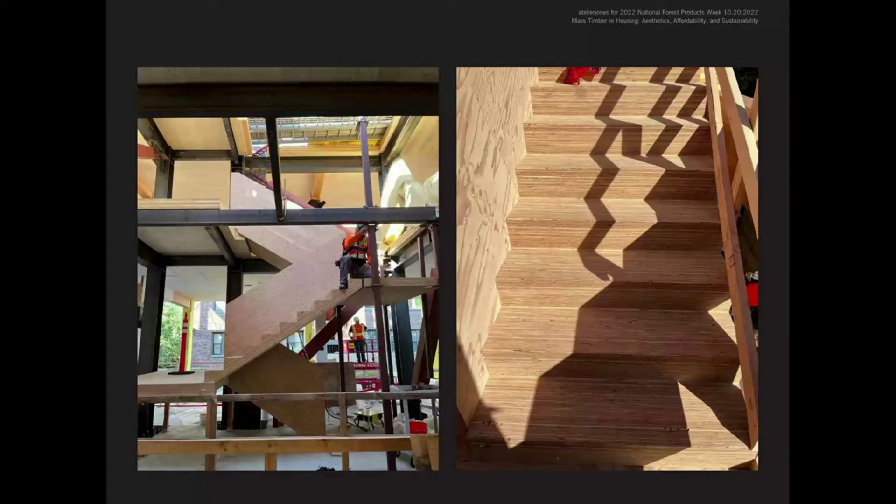This is the MPP product from Freres for the exit stairs. Everybody says, well, this is a lovely feature stair, it must have been more expensive. Nope - these are the exit stairs. They're right behind a little exit corridor, and they'll be there.

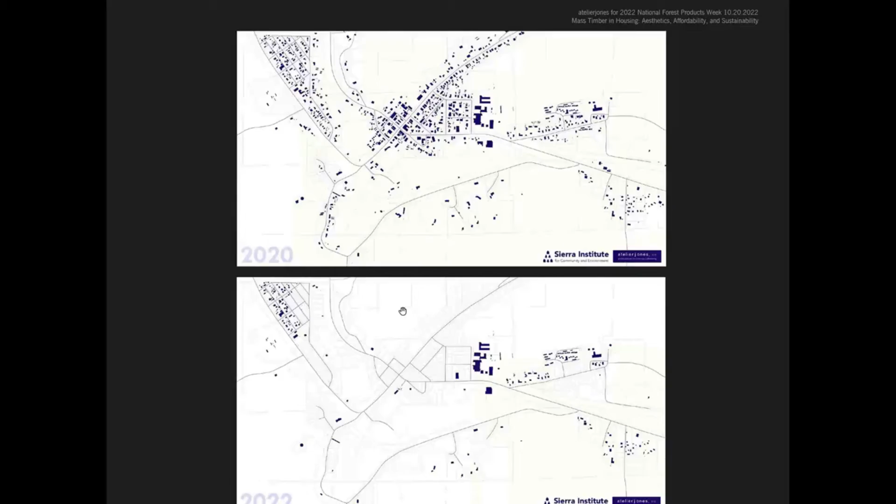The devastation was very real. This was a house site - you can see the walk, you can see the sidewalk, I'm standing on the curb. This is a house site that used to be here. You can see this really sad, but pathetic, full of pathos sign saying, 'we're rebuilding.' This is a family that is committed back to Greenville.

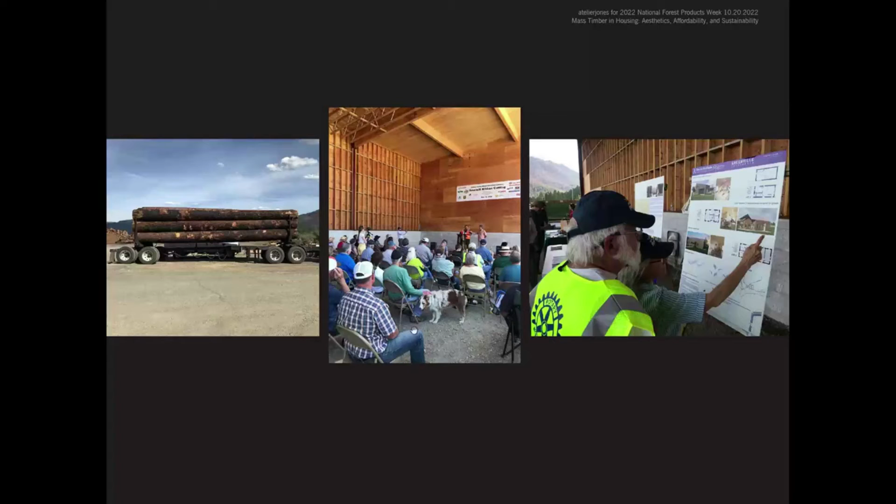We are working with this organization to help provide housing for families like this who own land in Greenville. We have a very small, humble effort - right now we have 3 houses under construction, which are going to be built very shortly. But we're also working with the community to build hope and to bring some of these burnt logs out of the forest, and we're still providing great lumber to help Sierra Institute build a mill and have this community shed that will be able to show some of the projects and ideas for the future houses.

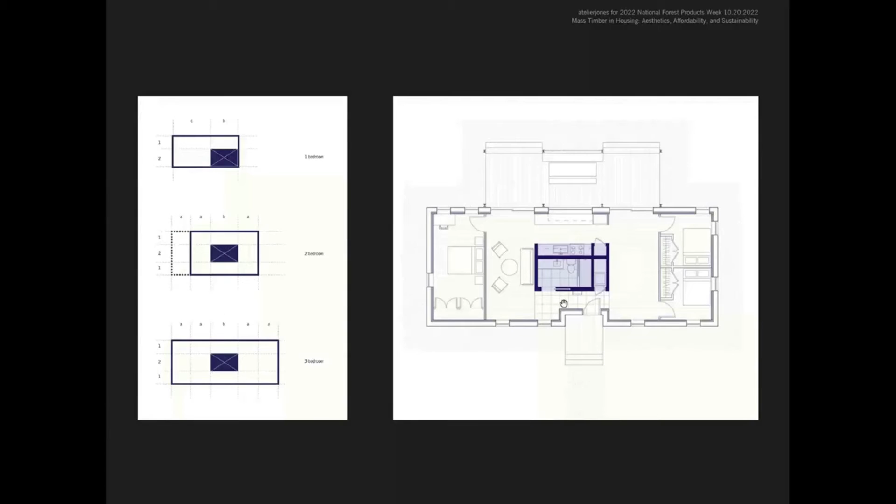So these are 3 houses, very simple houses, under construction. We're using modular wildfire-hardened strategies to help with this, including a modular wet core - we call it - that is in the center of each one of these houses, including the fabricated timber for the houses themselves. These small simple houses are between 600, 800 and 1,000 square feet. They can be built very quickly.

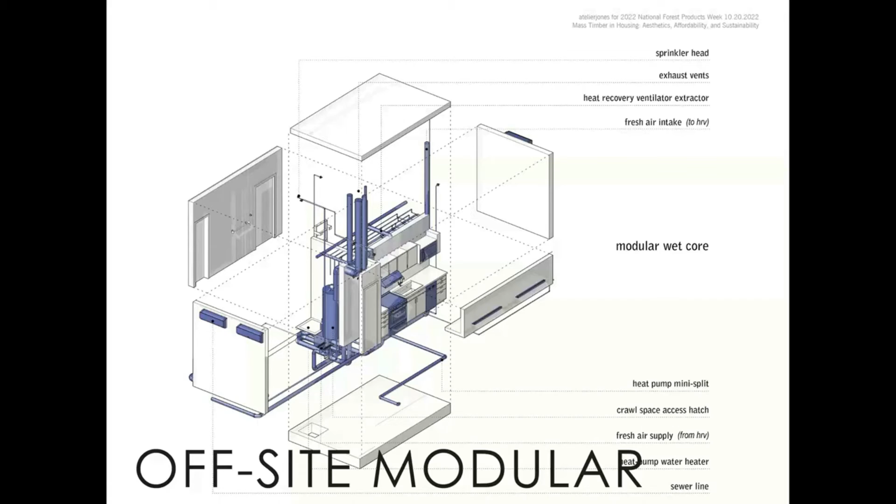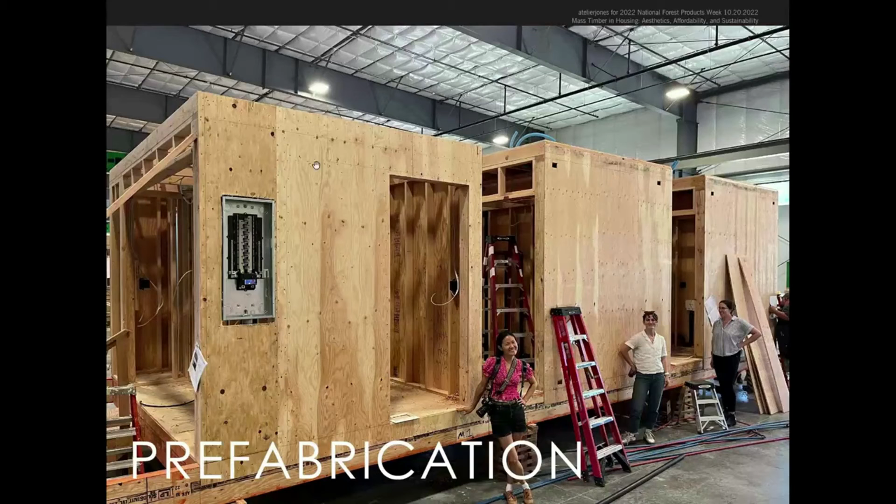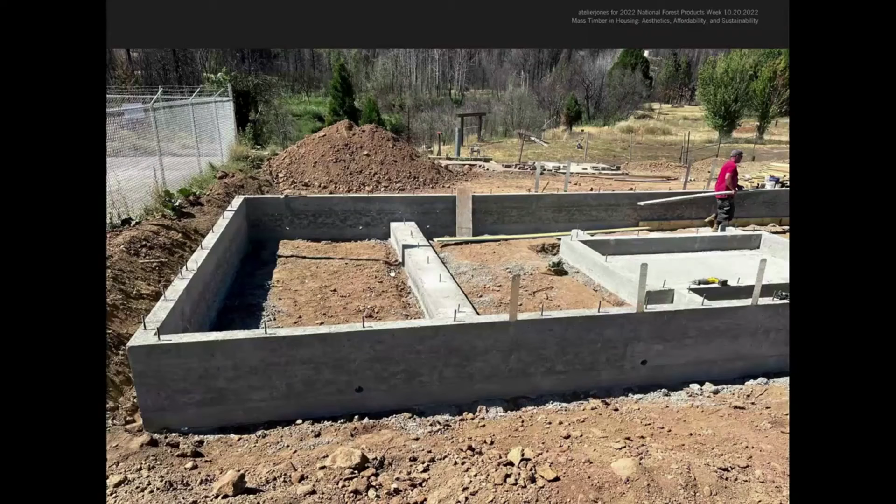It's so much in part because of these off-site production methods, with much of the complex construction and systems for these small houses being done off-site in a factory up here in Ferndale, Washington, then shipped down I-5 on a flatbed truck to arrive in the Sierra Nevadas to look like this. We're hopeful this will be finished - this was a picture from July. This is my office here, visiting the 3 mods that we drew up in about 3 months. They were then in construction for 3 months, and now they'll be down on site - in fact, they've already arrived, on October 5th, which is really exciting. This is the base down in the Sierra Nevada of this small 600 square foot house, and we'll be putting that wet mod on top.

Just in closing, I want to say how powerful it is to be able to speak to you all and to be involved with this mass timber world. We feel that our small firm of 6 people—this is half of our firm on site at our Heartwood site just a few weeks ago—we understand how impactful we've been and what the future holds for this industry, how we can replicate this 66,000 square foot mass timber building, and we can't wait to do it again.

Thank you very much for your time, and I really appreciate your attention. I'm looking forward to any questions that might come up. Thank you.

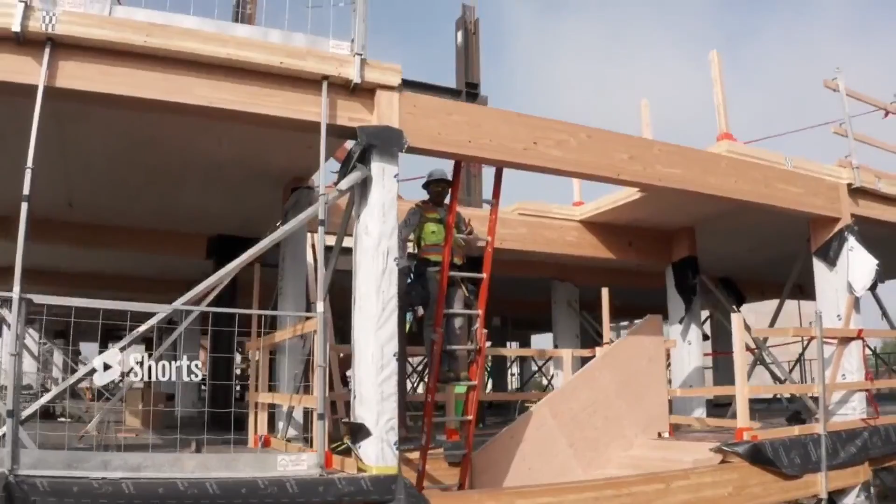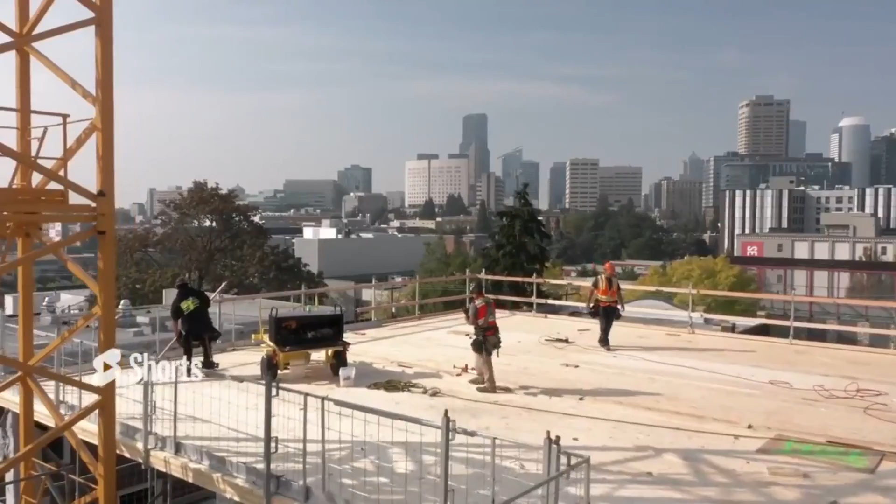This is a very sustainable product and helps us to fulfill our commitment to being environmentally friendly. The very nature of wood is that it stores carbon. Mass timber uses less energy than concrete and steel. We estimate that we are reducing our carbon footprint by approximately 40% as compared to more traditional construction methods.

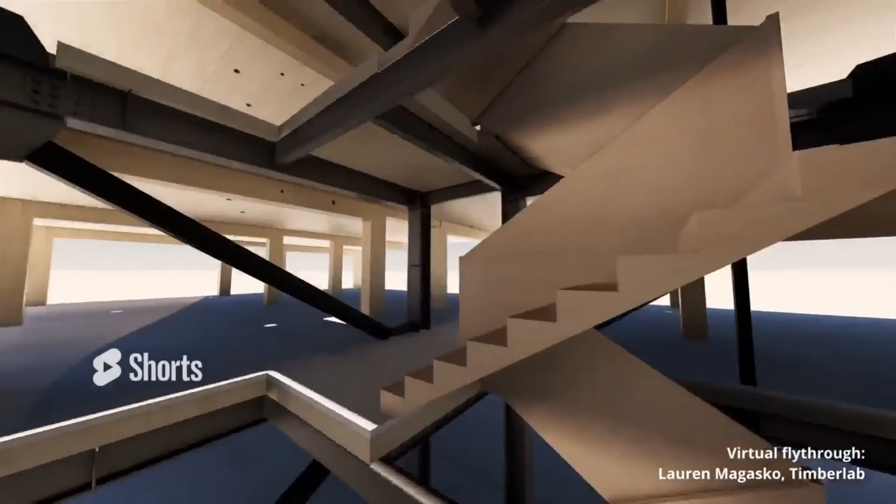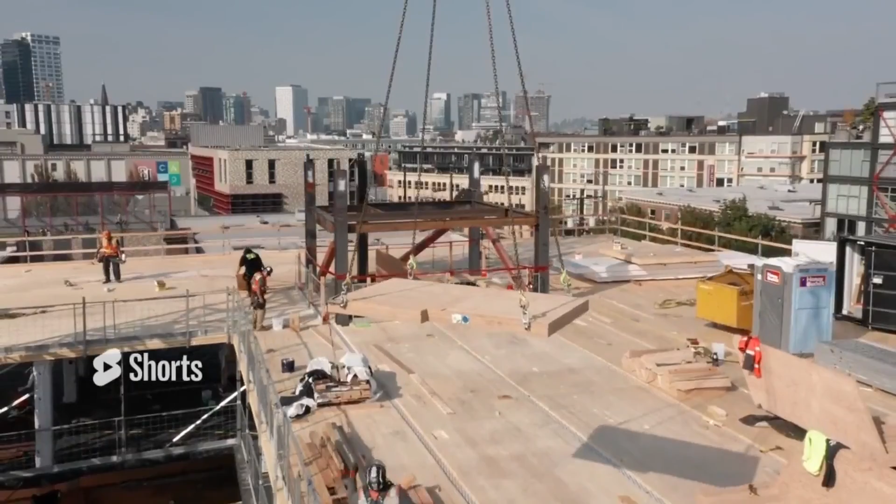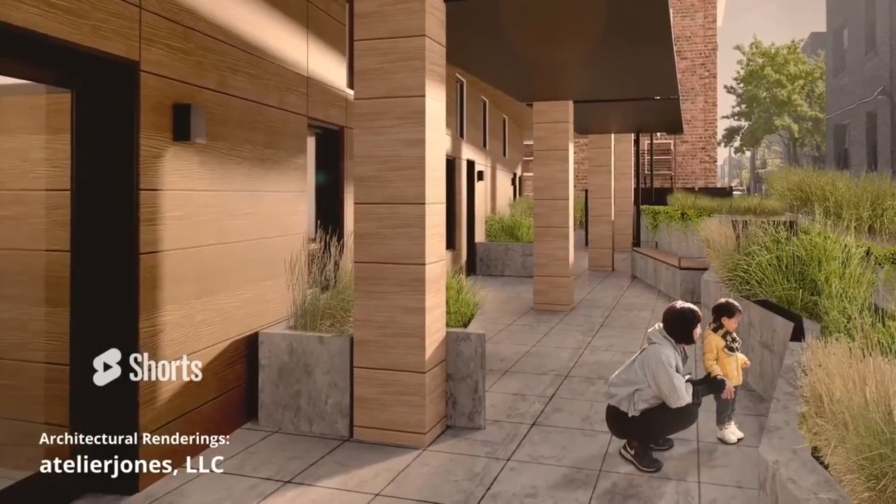It was built virtually. We were able to look at the entire building from a 3D perspective. The building is fabricated off-site to precision. There's nothing like seeing that timber flying. Then I feel like a kid again, reminding me of my Lego set. Putting the building together piece by piece, floor by floor is one of the coolest things you can see. Mass timber just creates a warm and inviting feel. There's just something about seeing that exposed timber that just brings a nice feeling.

This project has been wonderful. It meets so many of our key objectives at Community Roots Housing. But the day I'm looking forward to is the day we welcome our new residents at Heartwood to their new home.